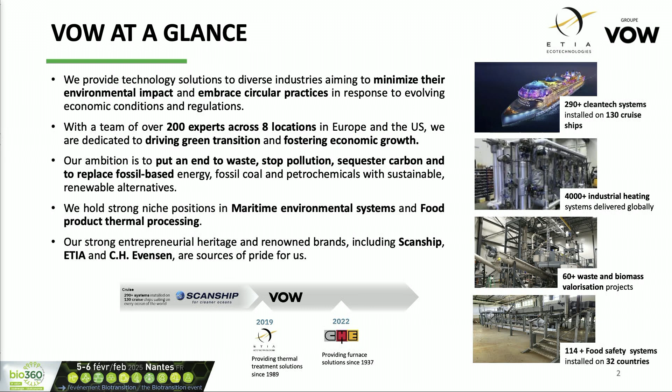Scanship, who is leader in providing waste treatment solutions for cruise ships. ETIA, who has patented and developed technology for thermal treatment, both debacterization and pyrolysis. And C.H. Evensen, who joined the group in 2022 and who is developing industrial furnaces. We are around 200 people inside the group, mainly in Norway and France, but also in the US and in Poland.

I say that we are working on decarbonation. There are different ways to do so. We can work on reducing the need for fossil fuel by producing recycled energy from polymeric waste. It's always better to use energy coming from waste rather than new fossil fuels. We work on developing carbon neutral energy by producing renewable energy from biogenic waste.

So as you all know, I think here, when we are producing CO2 from biomass, it is considered as neutral because it's the same CO2 that the biomass has taken during its growth. We work on carbon sink through production of biochar. And we promote electrical solutions using green electricity rather than fossil fuel technologies.

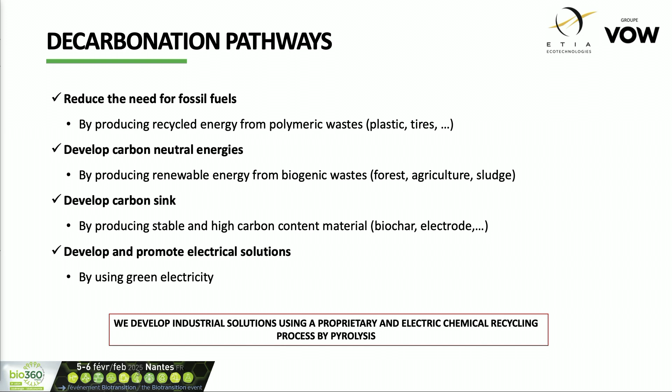All these decarbonation pathways can be achieved through heat treatment. When we are talking about thermal treatment of any organic product, it can be biomass, it can be waste plastics, it can be tires. If we heat this product with a lot of oxygen, we do incineration or combustion. We produce flue gas and ash.

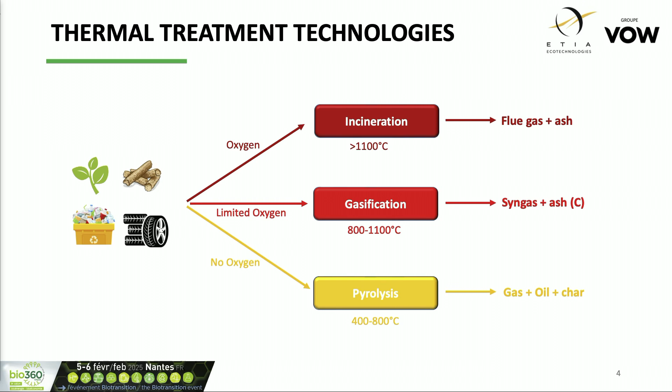If there is a limited amount of oxygen, we talk about gasification. In that case, the objective is to produce mainly gas and ash containing quite a lot of carbon. And if there is no oxygen at all, we are talking about pyrolysis. And in that case, we produce gas, oil, and char. During my presentation, I will focus on pyrolysis solutions.

To do pyrolysis, ETIA has developed and patented a reactor which is called Spirajoule. It's an electrically heated screw conveyor. So basically, we have a standard screw conveyor, and we send an electrical current on the screw. Due to the electrical current, the screw becomes hot by Joule effect, and that's how we can convey the product and heat the product at the same time.

And with this technology, we can go from 100 to 800 degrees. We can precisely adjust the residence time in the reactor. It's just the speed of the screw that will give the residence time. And we can also easily adjust the temperature just by adding more or less electricity.

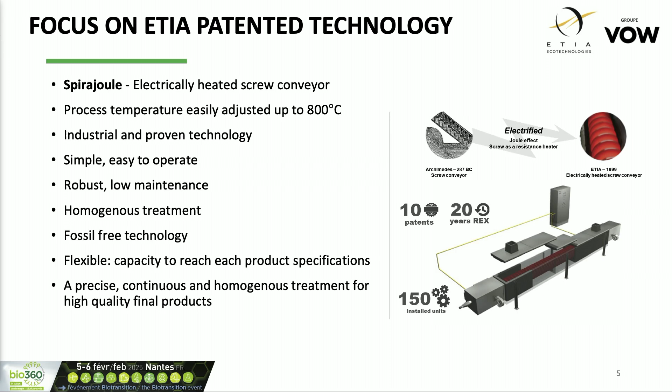This technology is integrated in a process that is called Biogreen. So when we talk about the Biogreen process, we have a feeding system to introduce the feedstock inside the reactor, the Spirajoule reactor, and we add a cooling system for the char, because at the outlet of the pyrolysis system, the char is still at maybe 500 degrees, so we need to cool it down to the ambient temperature. And during this process, we also produce a hot gas.

This hot gas can be used as it is, but it can also be cooled down and separated between condensable fraction and non-condensable. In the non-condensable gas, we have mainly hydrogen, methane, carbon dioxide, carbon monoxide. In the condensable fraction, it's what we call the pyrolysis oil. We have water, we have phenols, acids, aromatic compounds, tars, a lot of different compounds. And in both fractions, there is an interesting energetic content, while in the char, we are more focusing on the carbon content.

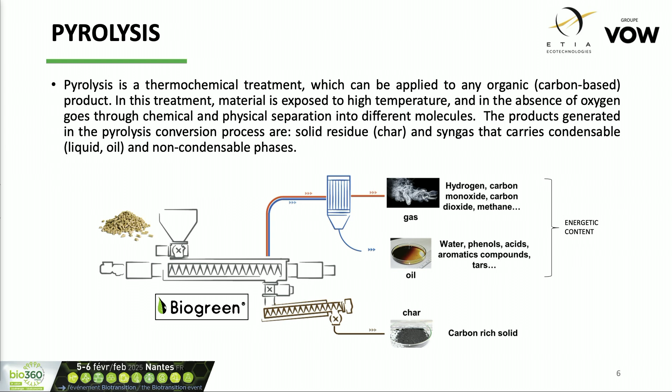If we go deeper into what happens during pyrolysis, you can see it in this graph. At the very beginning, we have only a solid, 100% solid. And when we increase the temperature, we will convert the solid into a char. The quantity depends on the feedstock, of course, and the temperature. On biomass, usually, we get around 20-25% of biochar. And if we work on other types of waste, it will be different.

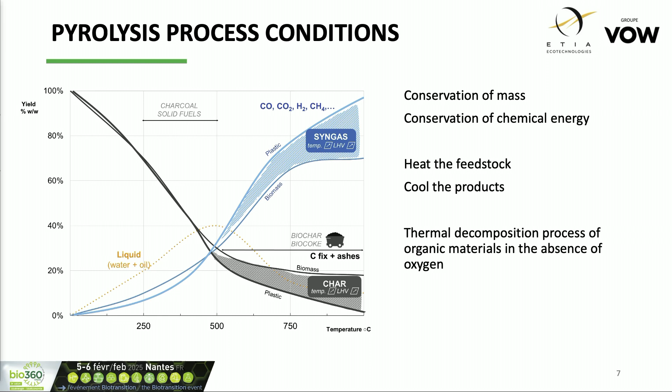We will produce a liquid with a maximum usually around 500 degrees. Afterwards, it becomes cracked, and we produce a gas. The higher the temperature, the more gas we produce, and the lighter it is. With our process, we can easily decide in which part of the graph we want to work. And depending on the business model that we have, we decide to go at low temperature or medium or high temperature.

This technology is already available on the market. Here you can see some examples of units in Sweden, Canada, or Japan. We can provide bench scale with a few kilograms per hour, and we can also provide containerized units or industrial installations up to 1 ton per hour.

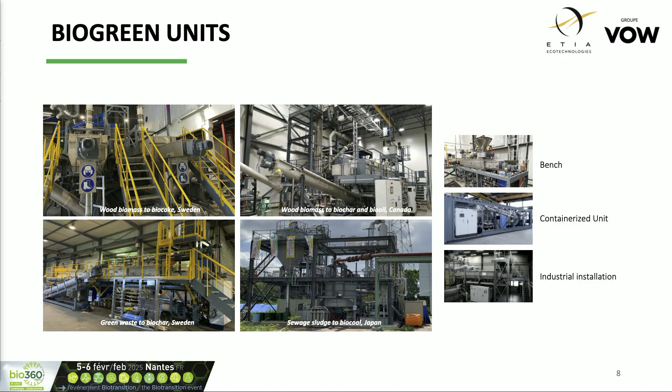Now, what I wanted to do during this presentation was to focus on the decarbonization pathway that we can achieve with this technology through real case studies. So I will present 3 real cases that we have provided and try to show how it can help in the decarbonization. The first one is in Sweden. It's a wood biomass to biochar and heat.

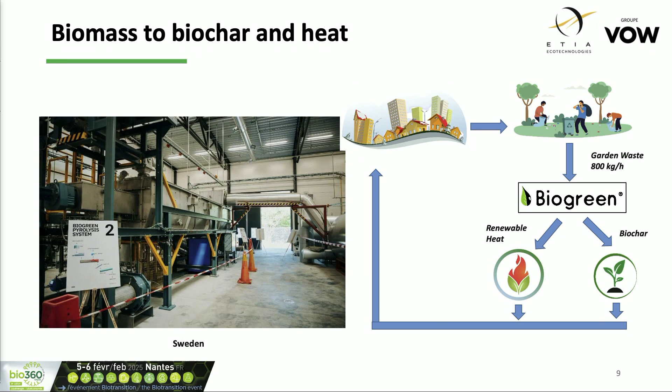So basically, we are working on garden waste in this case. At 800 kilograms per hour, we do a pyrolysis with our process, and we produce biochar and renewable heat. Both can be used on the district in a circular economy. What does it mean in terms of carbon?

So in these slides, it's not a life cycle assessment. I just want to point out what are the mechanisms allowing a decrease in the carbon emission thanks to this technology. So when working on biomass, the model is for 1 ton per hour because it's easier to compare one model with the other. We have an electricity consumption with our technology because, as you understand, we use electricity to heat the reactor. But in Sweden, the electricity is mainly from nuclear and renewable energy, so the carbon impact is quite low.

We produce a biochar that can be used as a carbon sink. The biochar is really very concentrated in carbon - almost half of the carbon in the biomass can be found in the biochar. And it is in a very stable form, so if you put it in the soil, for example, it will stay there for centuries. That's why we can really talk about storage of carbon and carbon sink.

We usually consider that 1 ton of biochar allows us to store 2.5 tons of CO2. So for 1 ton per hour in Sweden, that means 550 kilograms of CO2 per hour that is permanently stored as biochar.

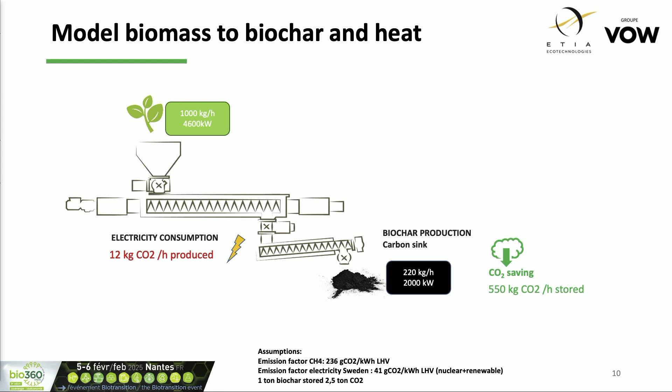As I told you, we also produce some hot gas. In this model, we just burn all the gas and the condensable together to produce some heat or steam. If we consider that it replaces some heat produced by the combustion of natural gas, we have, again, some CO2 saving avoided compared to the use of a fossil fuel. So quite interesting.

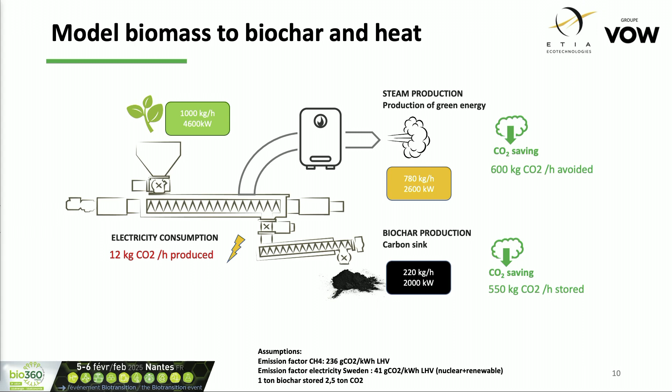We can develop the same kind of model to produce biocarbon and heat. This is a second case study. This time we are in Norway, and we are doing pyrolysis on wood - it's a residue from a sawmill - in order to produce, on one side, some heat that is used to dry the biomass, and on the other side, we produce biocarbon that can be used in the steel industry.

You may know that in the steel industry, the carbon impact is quite important and needs to be decreased. Replacing fossil coke with biocarbon is one pathway to reduce the carbon impact of this industry.

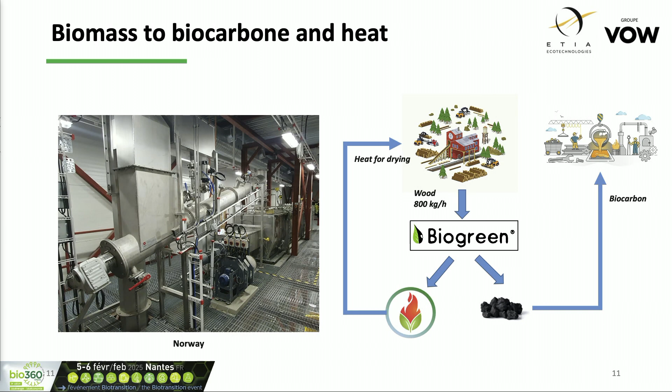What does it mean in terms of carbon? Once again, if we introduce 1 ton per hour, here in Norway, the electricity impact is even better than in Sweden because it's mainly hydraulic.

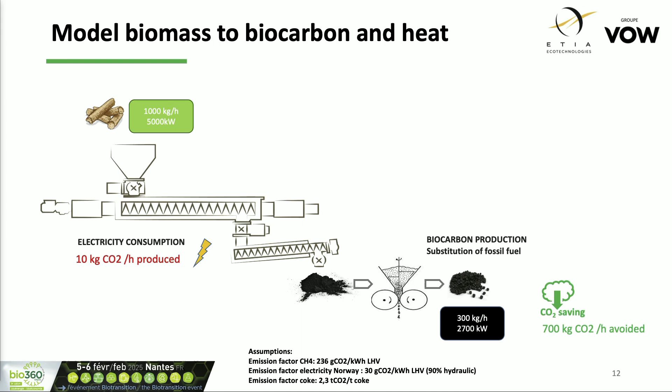We produce biocarbon. We need to pelletize it before being able to use it, and it comes as a substitute for fossil coke. We consider that 1 ton of coke is responsible for 2.3 tons of CO2, so that is CO2 that can be avoided by using this product.

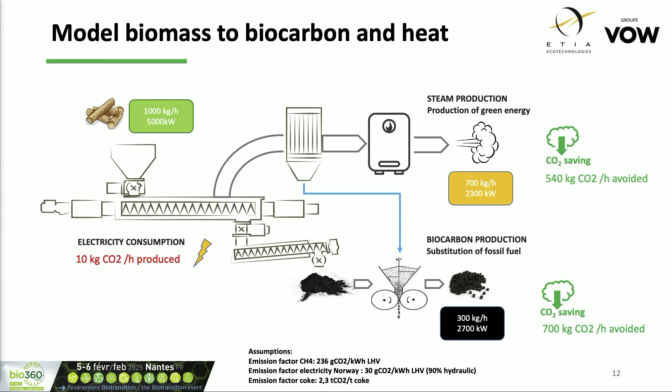In that case, we cool down part of the gas. We use the condensable as a binding agent during the pelletization, and we burn the remaining gas to produce heat or steam as in the previous model. So once again, it's a CO2 saving compared with fossil fuel.

The last case study that I wanted to present is a bit different. It's on waste tires, so it's not biomass, but it still works. In that case, we do pyrolysis on waste tires. We produce a biochar that is not really biochar - in that case it's recycled carbon black, a concentrate of carbon that can be used again to produce new tires instead of using virgin carbon black.

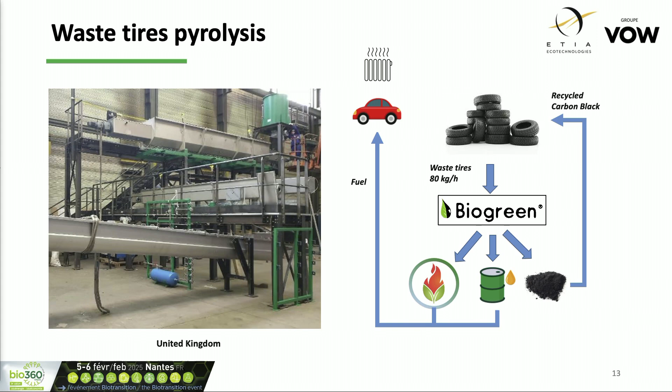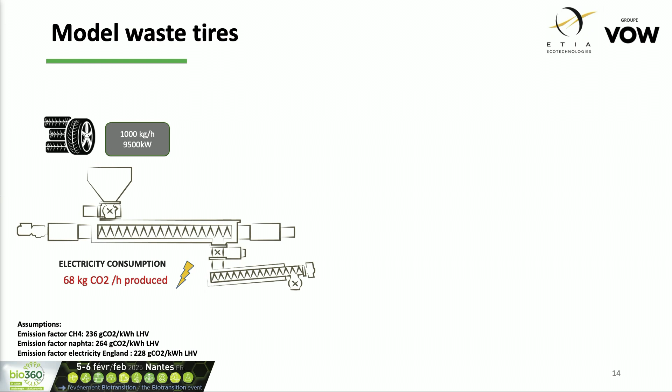And we produce a fuel and a gas that can be used as a fuel and for heat. In terms of impact, for this case, we are in England, where the electricity is still linked to natural gas, so the carbon impact is higher.

We produce some recycled carbon black, and usually we consider that it divides by 4 to 5 the emissions compared to virgin carbon black that is produced from fossil fuel.

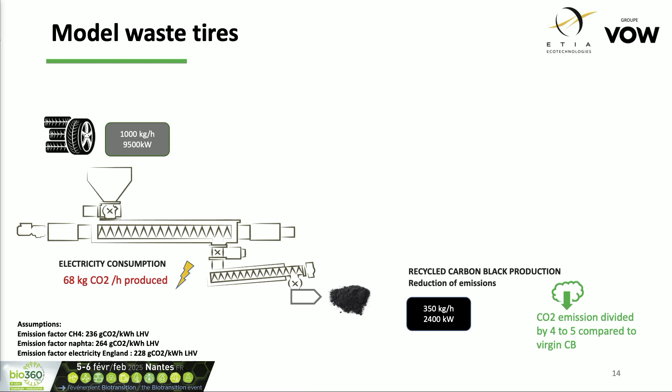And we produce a gas. In this model, we will condense the gas in order to get the liquid fraction because it's very energetic and it can come as a substitution for fossil fuel. And we produce, again, some heat with the non-condensable fraction.

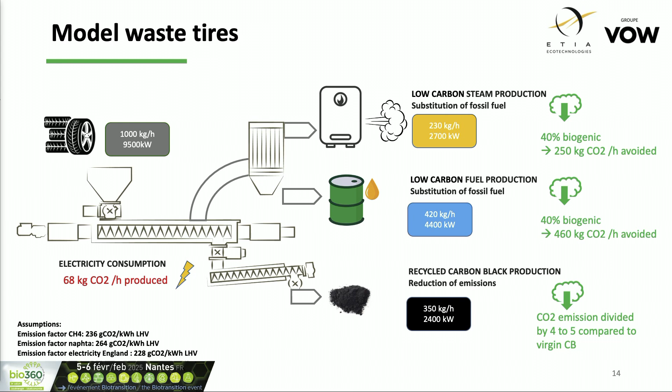In that case, the feedstock is not biogenic, it's waste, so it's only a low carbon product. But what is interesting here is that part of the tires is still biogenic. We have done some analysis showing that this biogenic fraction is not recovered in the carbon black, but it is recovered in the oil and gas. So even in this case, we have around 40% of the fuel that is biogenic and leads to neutral CO2.

So a quick conclusion. As you all know, decarbonation is not an option, it's a necessity. And pyrolysis is a flexible and already industrial tool to achieve this by production of carbon sink, by reducing the need for fossil fuel, producing carbon neutral energy, and using green electricity.

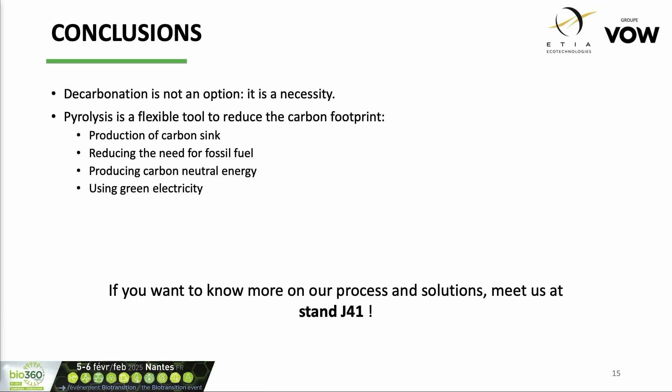Yeah, thank you, Maïté. So we'll ask questions after. I will let you go. Okay, let's go with questions then.

Thanks very much for the presentation.

I know it's the usual assumption that biomass is carbon neutral, but as you may know, it's less and less the case. First, in time, because you release CO2 that has been absorbed before, but it still means release of CO2 in the coming times. Second, because of the level, the forests are degrading more and more, and you will not recover all the CO2 that has been released. So I understand it's the usual assumption, but I'm afraid it's less and less accurate and real. I don't know if you have a comment, because I guess in the coming times the assumption of carbon neutrality of biomass will not be considered anymore.

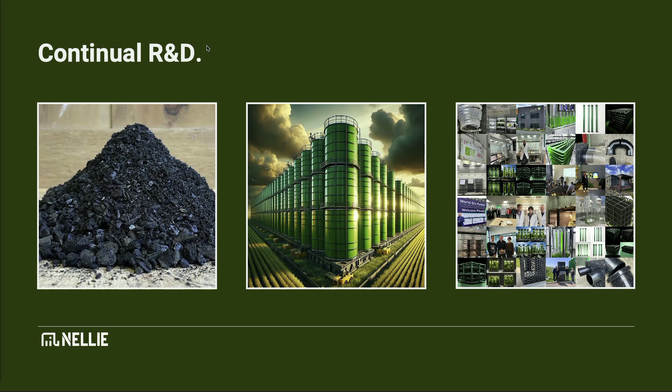Now, all of this R&D doesn't divert from our roadmap, it strengthens our roadmap. It means that we have a viable route to scaling our systems to over 100,000 tons of carbon dioxide removed every year by 2028, and realizing all of the environmental and socio-economic co-benefits that go with it.

It means that by 2030, we will have built something that's hopefully globally transformative with our future licensing and deployment partners. And the key there is partnerships. We could not have got to this stage alone. I am both morally and contractually obliged to thank our funding and support partners, but really, I am incredibly grateful to them because we couldn't have bootstrapped this together without them.

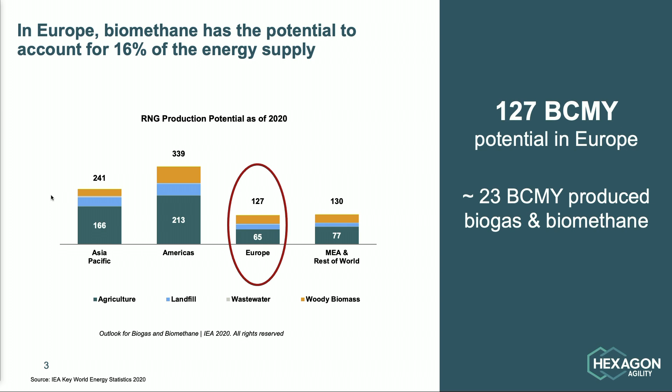We are all concerned about our energy security, which is also threatened by the war, just to name one issue, and actually we are not using what we have in-house. Most importantly, I would like you to focus your attention on the 65 billion that could derive from agriculture feedstock, so animal manure and agriculture residue. By the way, these figures include the UK, so it's not only European Union, it's the whole of Europe.

When we talk about agriculture feedstock, we get an average carbon negativity of minus 330 grams of CO2 equivalent per megajoule, which is the estimate made by CARB in California. What happened in California is that you can trade your biomethane based on the carbon negativity of the fuel, and that allows for increasing your price if your operation is really, really good. Going back to my previous slide, half of the biomethane that we could potentially produce is carbon negative. There is no such fuel at the moment. Even hydrogen is at most slightly carbon positive. So this biomethane is really what we can call the magic fuel.

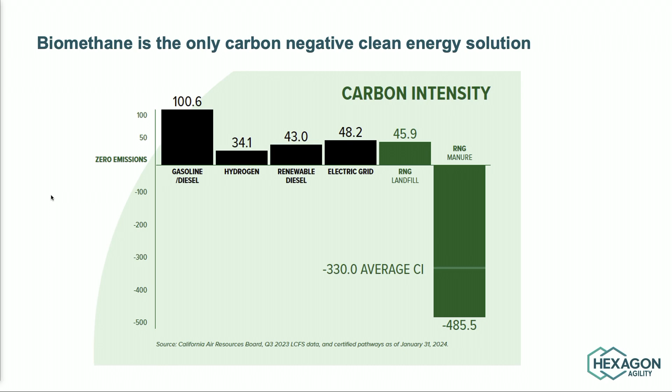I'd like to cite another challenge we have in Europe, and it's the problem we are having with the agriculture sector. We saw it last winter. Biomethane could be a source of revenue for farmers, because they have residues that could be turned into fuel.

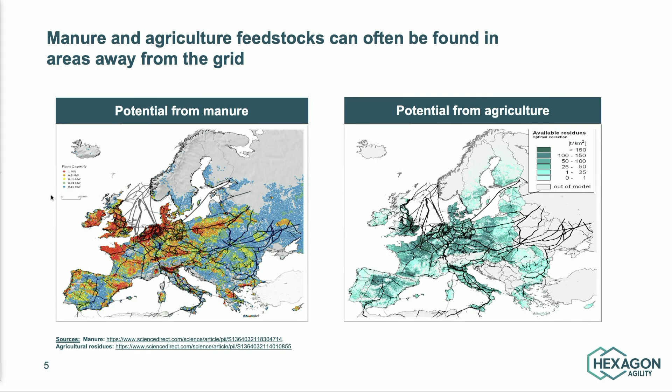As Hexagon Agility, we think we have a very good solution, especially for producers of biomethane that are located away from the grid. Biomethane produced with agriculture feedstock is normally produced away from the grid. Of course, you can take the feedstock, the animal manure, and move it to a biomethane plant that sits on the grid and then inject the gas into the grid. But then you have the cost of moving the feedstock, and also your CO2 emissions will go up. That's why normally you like to produce your biomethane where the feedstock is available, and then you probably have to compress the gas and bring it to an injection point.

Why am I saying that Hexagon has the right solution? We are manufacturers of composite material high-pressure cylinders and systems. That means our product is extremely light. When I take a high-pressure cylinder made out of steel, I'm talking about a product that weighs, give or take, 1.2 kilograms per each liter of hydraulic capacity of the cylinder.

And this is how the compressed gas industry has developed. Gas has been moved in compressed form by means of high-pressure steel cylinders that are very heavy. But it works well, and the problem is that you are moving a lot of steel and very little gas. It works since over 100 years.

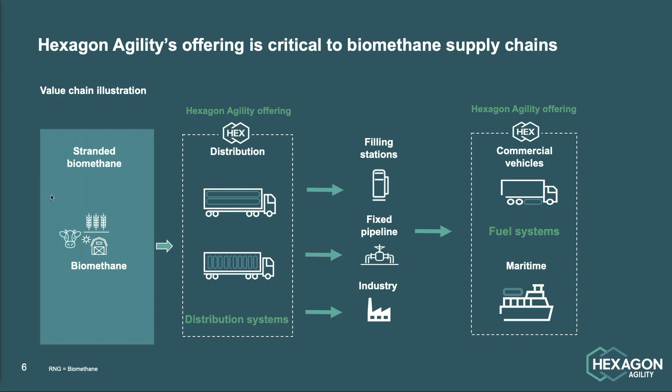We have deployed our products more or less globally, and we serve filling stations. We bring gas to injection points in the grid. We bring gas to industries. We deliver gas as a maritime fuel. This is what we do.

What is the average annual consumption of a French home? It's 18,000 kilowatt hours. Now, when I take an X-Store, which is basically one of our containers full of composite material cylinders, this container carries around 13,250 cubic meters. Let me show it. And that, in terms of energy consumption, could hypothetically serve 380 French homes in a week. Just to give the idea of the size of the storage that we manufacture.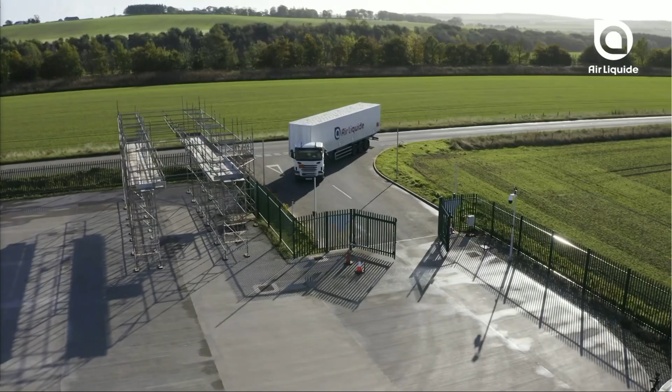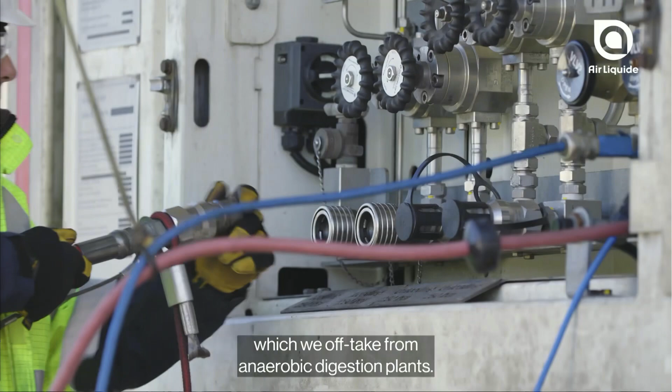Air Liquide does two things. On one hand, we produce biomethane out of biogas, which we take from anaerobic digestion plants. And on the second hand, we supply biomethane to industries for industrial applications.

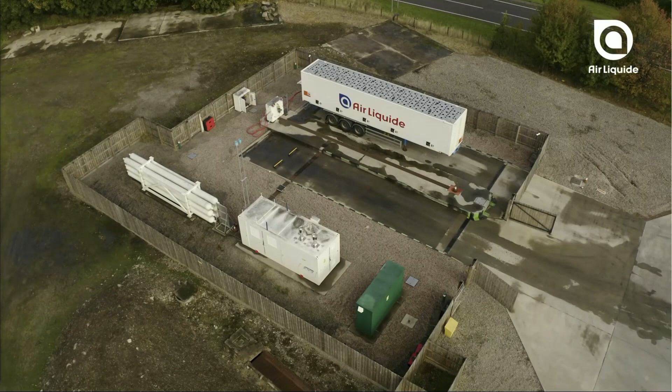Here at Glenmorangie, we have proposed a solution where we bring compressed biomethane from a station in Fordoun because the distillery is basically off the grid. We have to deliver gas on a continuous basis to Glenmorangie 24/7, 365 days a year. We built a station for the customer, which we own and operate, and the station delivers on average about 450 cubic meters per hour of gas to the distillery.

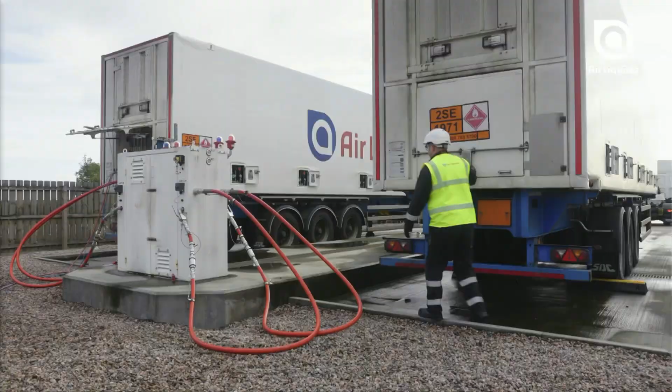The trailer comes in full, and the driver will unload that full trailer into pressure reduction station while taking off a trailer which is empty, and we call that a swap. It's a much better option than many of the alternatives we have, such as burning oil or diesel. I do believe for remote communities or remote sites, if you have enough demand, it's a really valid solution. And certainly for us, it's been transformative.

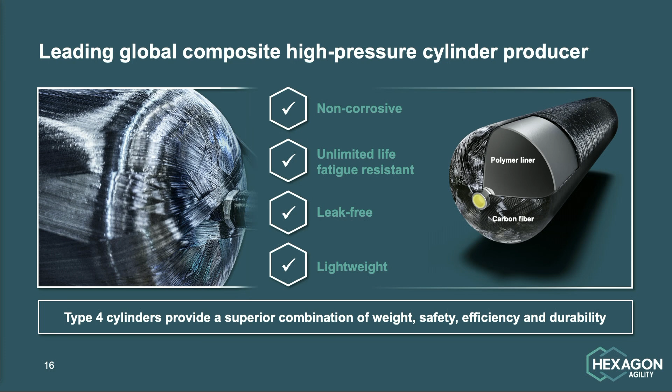This is a glance at the cylinder. The cylinder is basically a plastic liner wrapped with carbon. It is not only very light, it is also non-corrosive. It has unlimited ability to cycle. It suffers no fatigue. It is leak-free. It behaves very well in case of fire accident because the liner melts and there is no way that the cylinder builds pressure in a bonfire.

So I'm about to close. One last question, just to give the sense of what we do. What is the longest mobile pipeline that we run in the world? We have it in North America, where we move helium between Canada and the United States, and the gas is transported through a route of 1,700 kilometers. I must say, in Europe, we have a very good business case already when we have to move gas through distances between, let's say, 15 kilometers and 100 kilometers, because that will be the case in Europe. The grid is very well developed and distances are not big.

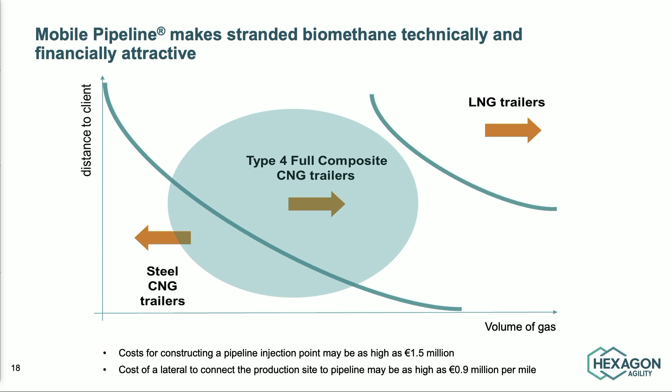But to wrap it up, let me talk about Europe again. You probably know that the European Union has set a target at 35 billion cubic meters of biomethane per year. We saw earlier that the potential is 127, and today we are only making 5. These 5, or let's say 23 billion including biogas, account for only 3% of the energy demand of Europe. Hexagon, with this mobile pipeline solution, could really be the key to bring REPowerEU to fruition.